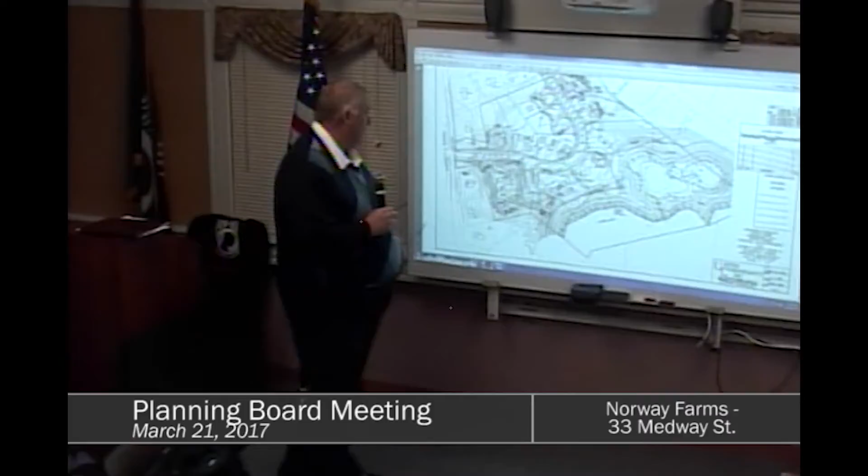All right, good evening. Rick Goodrow with United Consultants, here with Bob and Jean Kane, the owners of the property of the Norway Farms project that's under consideration. At the previous meeting, there were a lot of items discussed, review comments that were received from both the town planner, planning board, and the planning board's review consultant, Beta.

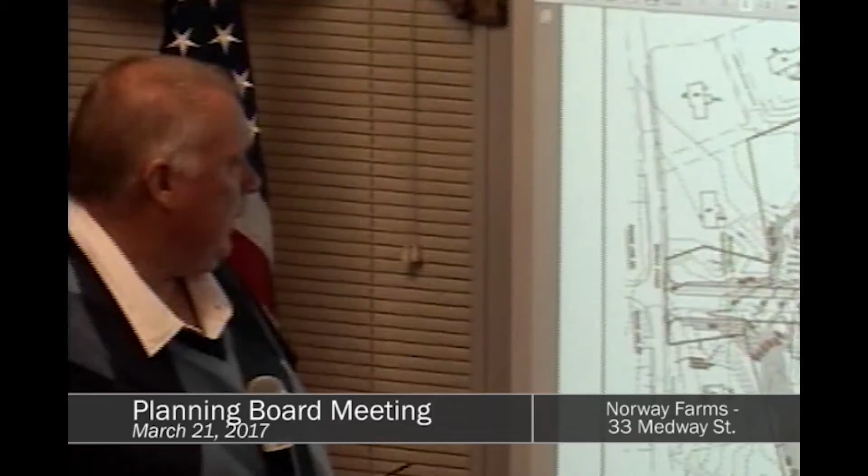We've taken those review comments, we've had some meetings with the town planner, some discussions with Mike from Beta, and also with the DPW since the last meeting, and we've made some changes. We felt it would be wise to come in and talk with the board about the changes we made to get some feedback before we went into a full redesign.

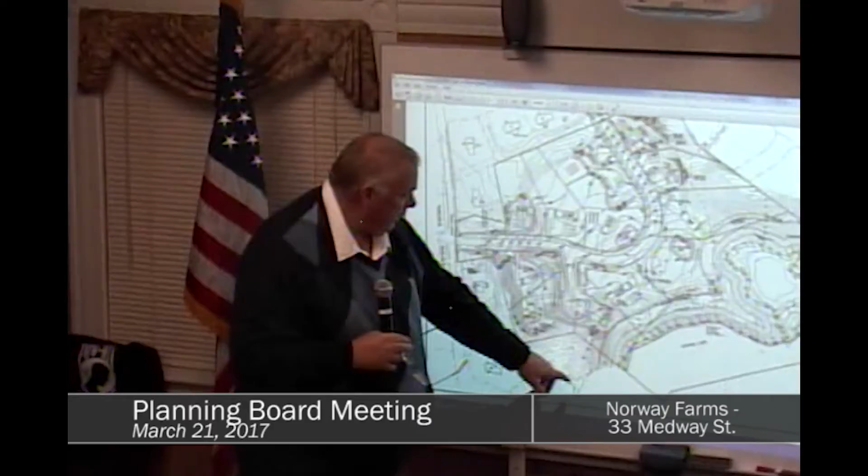So what I'd like to start with is we've modified the entrance road by relocating it to the south a little bit. We've also been able to pull the cul-de-sac away from the boundary line of one of the abutters that was concerned with respect to the grading and trees to remain in that area.

We've also proposed to shorten the cul-de-sac slightly, which would require a waiver from the minimum length of your cul-de-sac requirement. We could extend it if necessary, but again, we were trying to be sensitive to that neighbor.

We also reconfigured some of the lots such that we had the houses and the septic systems and whatnot reconfigured.

What we also did is we provided numerous sketches to the town, four I believe, and I do have copies of the various sketches. I believe the town planner had distributed those sketches to the various board members.

What we basically seem to have come up with is this sidewalk here would be pulled in such that for approximately 150 feet, it would be abutting the roadway, thus no grass strip would exist. By reducing the width of the roadway pavement from 26 feet to 24 feet, we were able to eliminate the need to have both retaining walls. So we felt that was a good fit in that area.

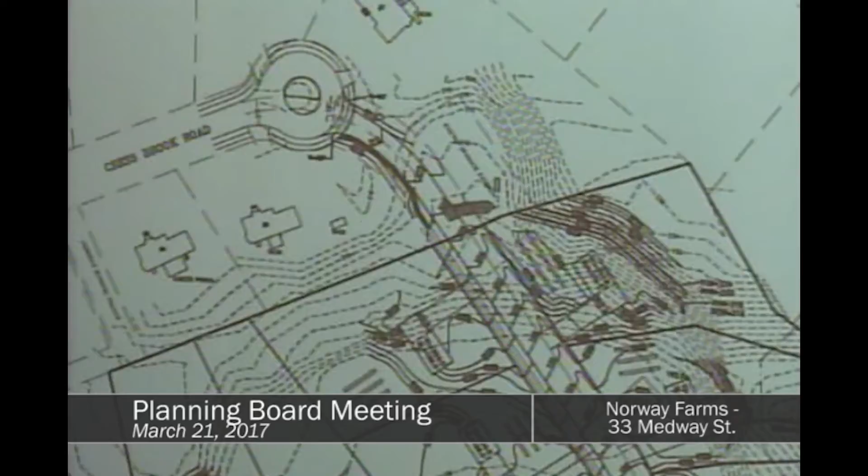Obviously, those requirements of a reduced pavement width from 26 foot required to 24, and the sidewalk configuration, again, would require waivers from the board. We wanted to get some input on that. We did do some various layouts of modification to that island, leaving it there.

We did provide a sketch of the island and turn roundabout, if you will, at Union Street, overlaid on this to give the board an idea of the size and geometry of that. But that all being said, it seems that the best scenario is to basically create a through road in both directions.

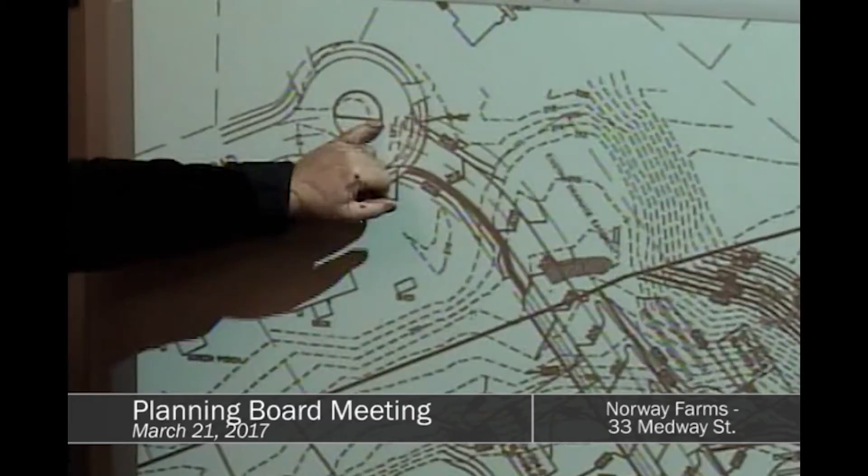So we've provided you with a dashed line so you'd see how that would be. It's just an extension of this radius, which would then terminate at the straight part of the existing roadway, and the cul-de-sac island would be pulled back with two radii installed at each end and a larger radius in the middle, basically bringing that curve right around.

So we felt those are all positive things to address the concerns of the neighbors in this area with respect to the retaining walls and the island, allowing for that existing cul-de-sac area to remain for parking of emergency vehicles, et cetera, and then creating what appears to have been intended when this was originally laid out, which was a through road. So we felt that was a good compromise.

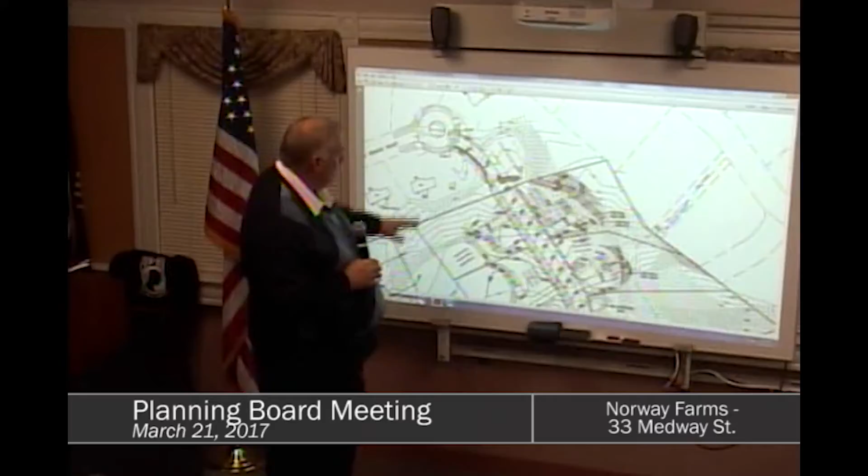What we also did was we proposed to super elevate the road, eliminate the crown, create a drainage swale. Amy, if you could please pull that up.

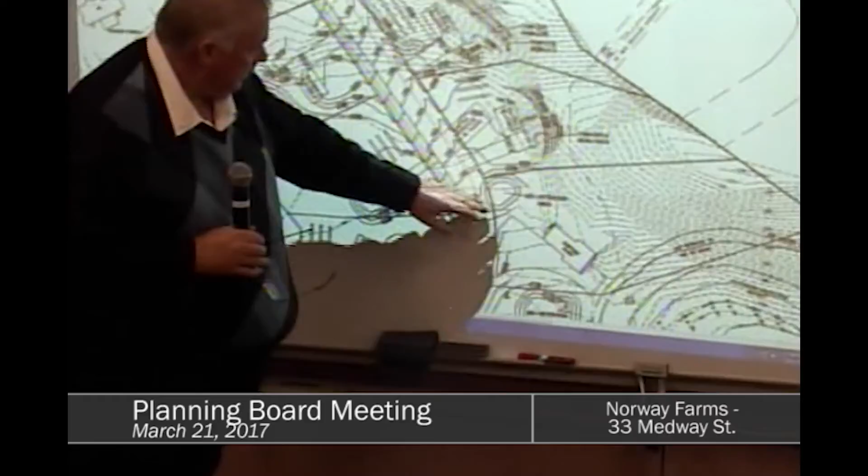Drainage swales would basically discharge to a bioretention area here. Ultimately, that would connect to that bioretention area there. This bioretention area is in the same general area as the original, but much larger bioretention area, that was reduced in size because we were looking at adding some bioretention areas around the site. There's actually four additional ones.

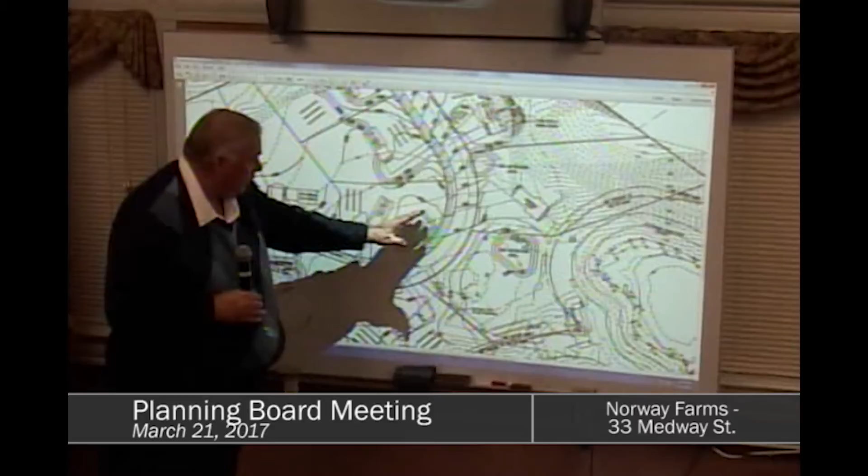So the watershed is such that this area drains towards the roadway. We would capture it through the grading here into a bioretention area here. We would be able to capture the roadway water here, as well as the lot areas, into these bioretention areas here. We have not done a full design, details, et cetera. We have looked at it more on a macro level, and the numbers seem to work.

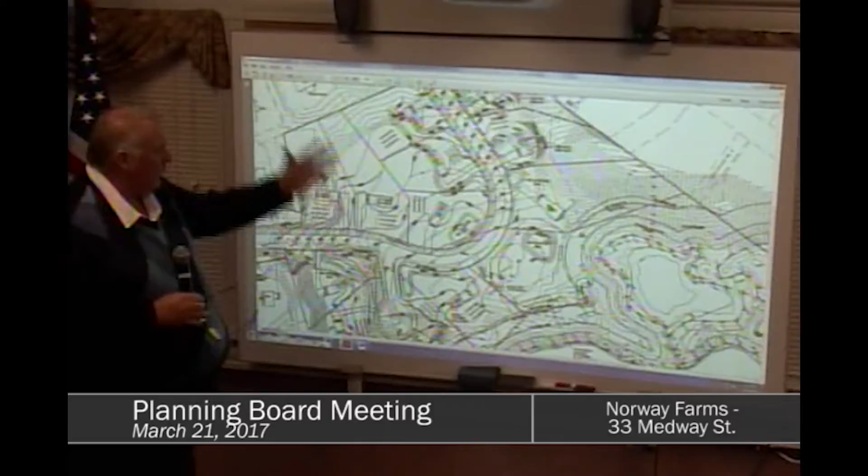But we have such a change from what was originally proposed with curbing and stormwater being captured in catch basins and pipes and sediment forebays, that we felt it would be wise to come in and show everything to the board, have some more discussion with the neighbors, get some marching orders, and go forward.

So that is basically a highlight of the changes that have been proposed. As I said, we have had discussions with the town planner and Beta. I'm sure they can make comments to the proposal as well.

A couple of questions. Could you slide that drawing over just a little so we can see the entrance off Medway Street? You see the cul-de-sac too? There you go. Shrink it? Yeah, we could shrink it or whatever.

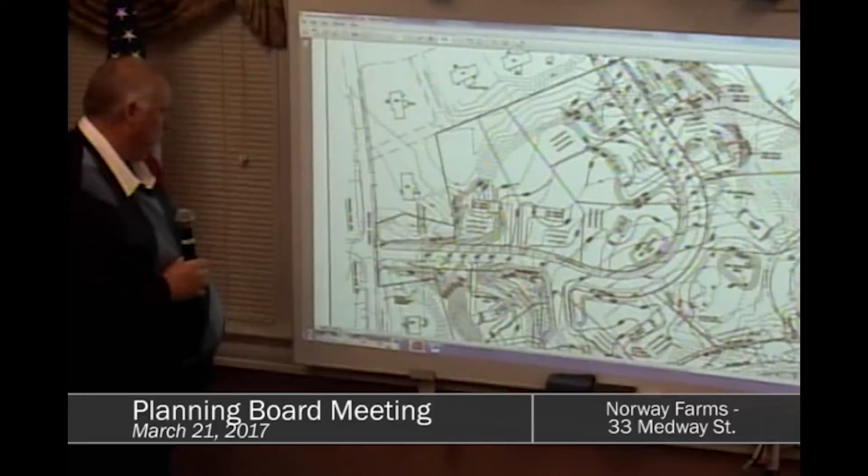Roughly how many feet did you move that road there you were talking about? This road, yeah, here, the entranceway, the entrance stayed where it was. We basically took it from here, exaggerated, and turned it up. Okay, all right. And then what that did was it pulled this back about 25 feet. And then put this curve in, reverse curve into it.

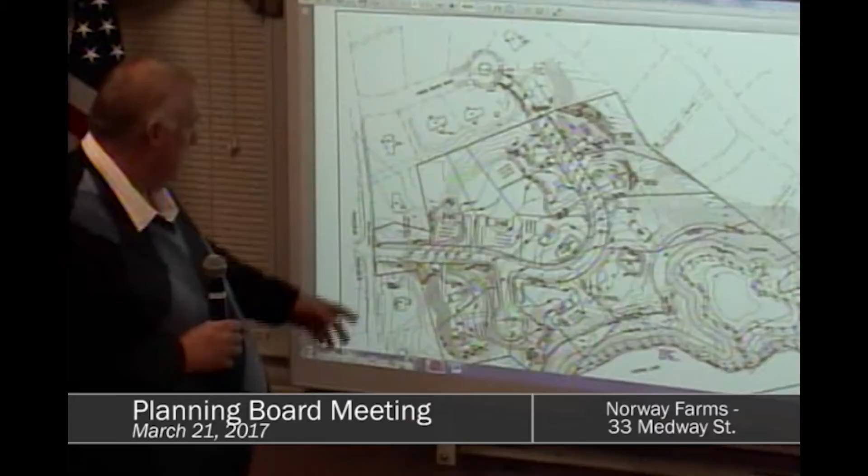All right, now the cul-de-sac, you said you shortened it a little bit? Yes. How much? On top of pulling it about 25 feet, we shortened it about 5 feet. So the length of it today on that proposal is what? I believe it's 245 feet.

It's measured from the center line intersection to the end of pavement. And on the roadway up the hill towards the cul-de-sac, did you change the slope of that?

We did not, but we looked at that. This cul-de-sac basically has a high point right here, and then it comes down at this area at about a 3% grade. So our roadway came up and was at approximately a 3% grade at this location, basically tying in within 1% of what's already existing. That'll happen from here to here.

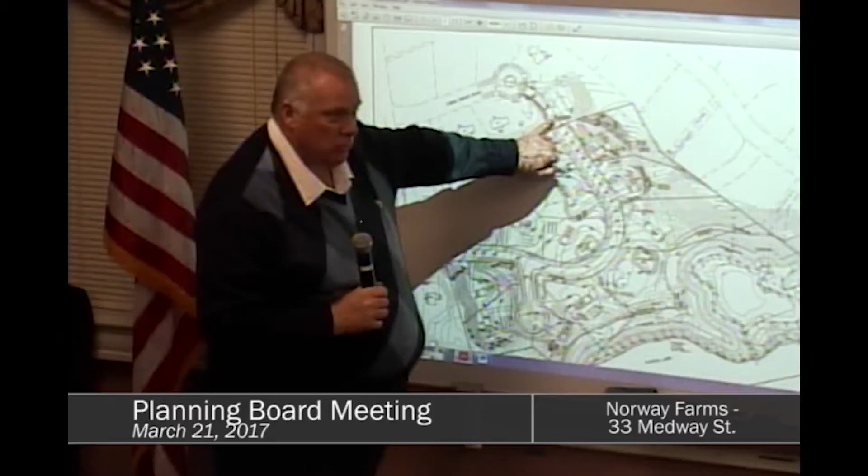So it's roughly a flat spot up in that area, it's already going uphill. From here to here, we're mimicking that, if you will. The steeper part begins way back here. And what's the percent grade? This was 6, I believe.

Jen, any questions? No, I don't think so.

I was going to ask if there was any effort to do more open drainage, but it sounds like you tried to incorporate that, which was good. And then just trying to keep as much of the forested buffer as possible, which it sounds like on the south side you were able to do. On the north side, there's a good forested buffer around the entire parcel, pretty much, isn't there?

There is. My point is just, would love to see the clearing and grading limited as much as possible. I know you have to do what you have to do.

In reality, there really won't be, we're proposing very minimal grading in the wooded area here and up here, and then obviously for the road construction, a little bit here and a little bit down here. This area is wooded, but we certainly don't want to be cutting down trees to create lawn areas for yard extensions. So that's not necessarily in the plans to do that.

Okay, that's good, so we want to maintain that. One of the comments from Beta was to define the limit of work. We had defined the limit of work for the areas in the vicinity of the wetlands to address the concerns of the conservation agent, and we're going to further identify a limit of work on the final plan set.

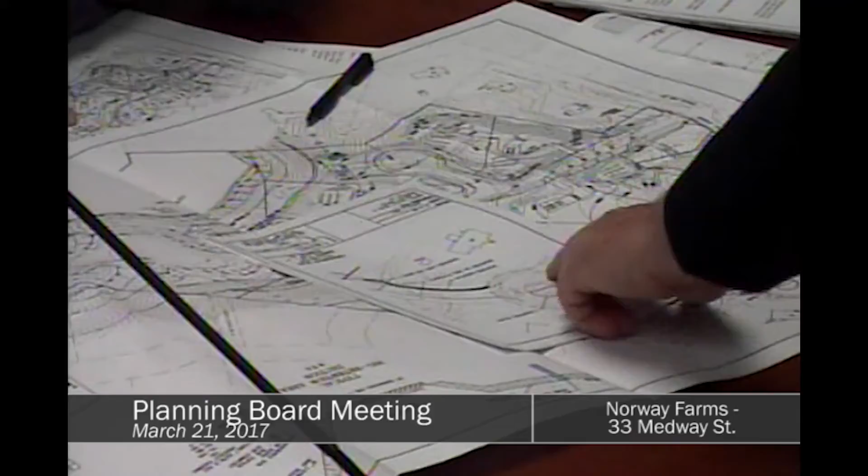So the transition would occur in that area from 26 to 24 feet, and we could look at various things for that bulb there. Yeah, I think it works.

And I have more of those sketches if other board members would like to see them. Rick, can you grab me one? I was having trouble visualizing it. So what happens to the top part?

Is that left there? Yeah, that's just left there. Is this all pavement? That's left there, yeah. So this pavement up the top is gonna be left there but not used? That would be the area for emergency vehicles. So you're gonna have the road going right here, and you get this, but this is all pavement. That's correct, it's gonna stay.

There's still two driveways coming into that area. Yeah, I know, that's what sort of... it's different, very different. I think it looks shitty myself, but, oops.

This is supposed to be uniform, that's the only thing I disagree with. It's supposed to be harmonious, right? So basically now the harmony seems to be gone because we've got a 26-foot road going into a 24-foot road. We got one place with a sidewalk, two sidewalks on the other, and then you're gonna have this huge paved area here up at the top.

That's a big area, that's a real big area for pavement. I don't know, just personally, maybe the neighbors could... I don't like the look of that at all. I think it's a lot of pavement. How long is it at the longest length? Like 35 feet up at the top there?

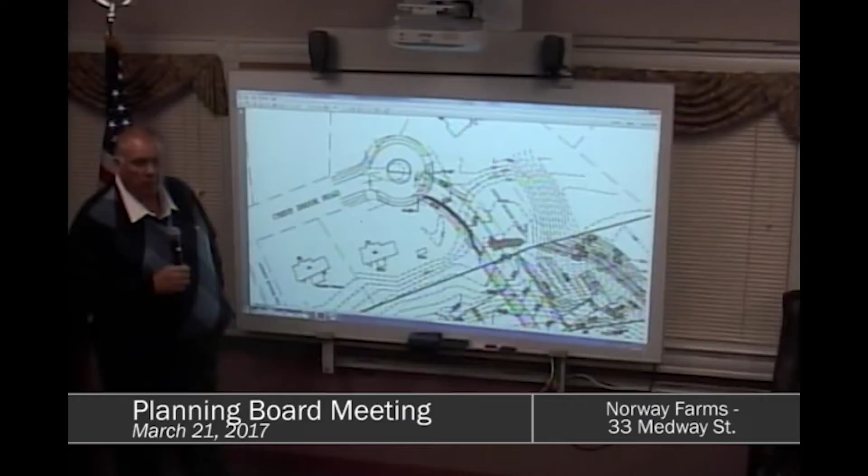My recollection was that the neighbors were concerned about having the two parking there now, and that they would lose their parking. So this was one solution to that issue of maintaining the parking.

But I mean, how many driveways are going onto that big half of the cul-de-sac? One driveway here and a second driveway here. I mean, I know it's hard to see it on paper and visualize, but that's a lot of pavement.

Yeah, the other thing that's important, I took from the conversation at the last meeting, was that the cul-de-sac, the island of the cul-de-sac, was carefully landscaped and maintained by the neighbors, and they'd like to keep that. They don't want to lose that. So this was another way to...

But they're losing half of it. They'll lose half of it, but keep some of it anyway. Maybe the neighbors should wait - it's just my personal opinion, but maybe they can have a say if they understand what it looks like.

What's deceiving is when you have something on paper, sometimes you can't understand the enormity of how much asphalt is going to be there. Well, it's not like we're creating it new, John, it exists. So what you're doing is you're taking the landscape area in the center and cutting it in half.

That's true, that's true. And the reason we're doing that is to respond to the neighbor's concern that there was not enough room if we limited all of that above where Rick proposes the curb to be, and just get rid of that. There's not enough room for emergency vehicles, and I have a handicapped son who uses them from time to time.

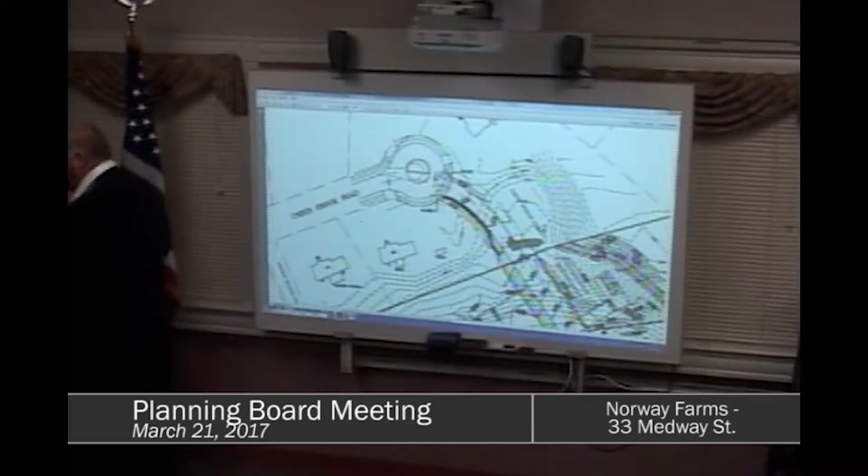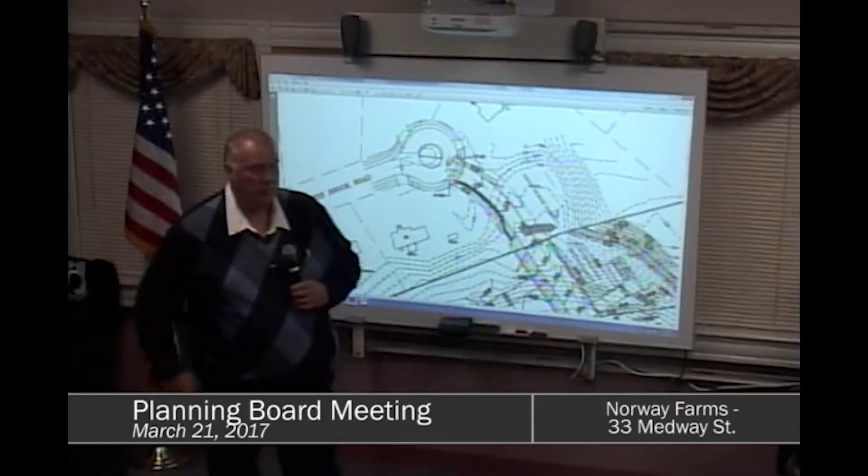What's wrong with sketch 3? Sketch 3 is basically the overlay of the geometry of Union Street in dark color compared to the existing cul-de-sac, just for comparison purposes, so you can get a feel for how that would work, how the traffic calming would work by going through the roundabout at Union Street. That would be if you just left it alone - it shows you how big that cul-de-sac actually is.

I always like the idea of mitigating the speed of traffic by having them slow down when they can see and go around the cul-de-sac slowly, leaving way more landscape. I don't know if the folks that are going to be there realize that's a lot of pavement - when it's paved, you're going to see it's a real lot of pavement, that's all I can say.

To me, a kid could go right through, nonstop. I don't think that's what I had in mind last time. I thought the island was a good factor just for safety. Well, it looks like he has other options here where it would preserve the entire thing, and a couple of them.

One other question - can you describe these bioretention areas all along the roadway? What do they look like, how deep is the grade down, and they're grassed, I'm assuming? They're approximately 2 feet in depth, with a 3-to-1 slope, though we could certainly flatten them to a 4-to-1 or 5-to-1. They would be vegetated with various plantings as originally proposed - trees, shrubs - to make them landscape features as opposed to a typical detention basin.

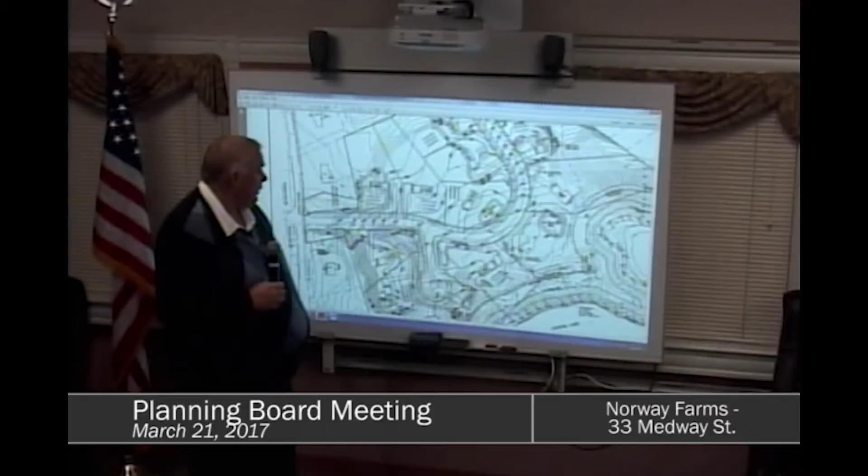How do you construct the side of the road that has just the pavement edge with no berm to stop it from chipping off and becoming a rough, uneven edge? There are various things we could do - what we were proposing is to put a pea-stone diaphragm, which would allow the water to go into the diaphragm. No, I'm talking about the side of the roadway that's not going to have a berm.

At the side of the road, you'd have a pea-stone pavement edge and abutting grass area. Then there would be a pea-stone diaphragm approximately 8 inches wide and 12 inches deep. The water would flow into that instead of going back under the road, which would help protect the edging of the pavement.

Have you seen this in use anyplace? Yes, we've actually looked at the Norfolk landing site. We've had that design utilized in Franklin.

Is the water on this side where there's no curbing, is the elevation pitching away from the street? The elevation of the road would be cross-pitched in this direction, directing the water from the curb line into these. What John's asking is, if you've got no curbing on one side and the sloping is coming down to that pavement, what you're going to have is the water infiltrating over time and causing heaves.

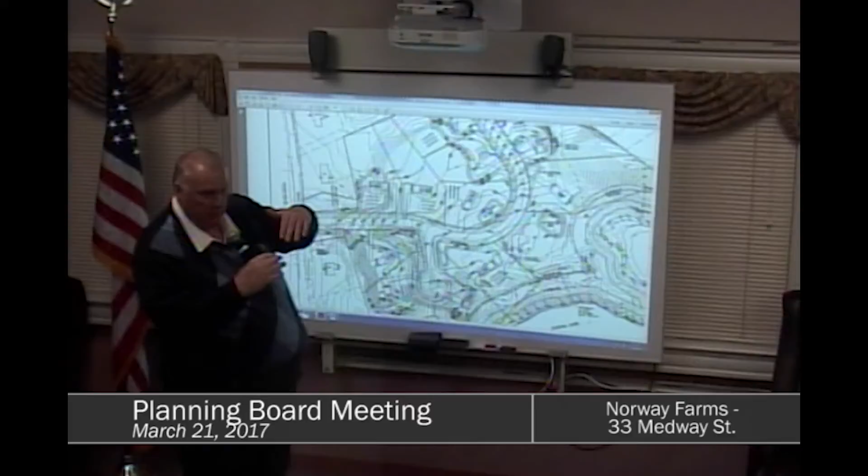From the roadway? Yeah, that would be one of the benefits of the pea-stone diaphragm, to get the water into the diaphragm and then out of it. The diaphragm could be pitched so the inlet side near the pavement is slightly higher than the outlet side.

The problem, once the plows come, is with the pea stone on the side. We curbed that whole thing, I thought. Can we do the Cape Cod berm for low impact and still have curbing? The plow goes around once and you've got this pea stone border around the perimeter of the street. The plow digs that up, and your protection is now all gone.

We could use curbing on that side to channelize the flow, and then just do an area where the water would run off from the gutter with a larger stone. We'd have to analyze what the flows would be, because you've got to think down the road, once this is in existence and the town takes it over with plowing activity.

That's the same issue as a gravel driveway. They're normally redone periodically because after the plows come, the gravel isn't the same as before. You see this happening in the street over a couple of years once the town accepts it—it's a constant maintenance program.

We did that with curbing on Frederickson, so we just have little sections where the water can run out. So the whole side isn't lacking curb—it's all Cape Cod berm, and then they have cutouts here and there.

What Rick is suggesting, and what Bob wants to do, is avoid that Cape Cod curb, because that gets torn up by the plow too—it gets damaged over time. Not the monolithic curb? Yeah, the plow will tear that up as well.

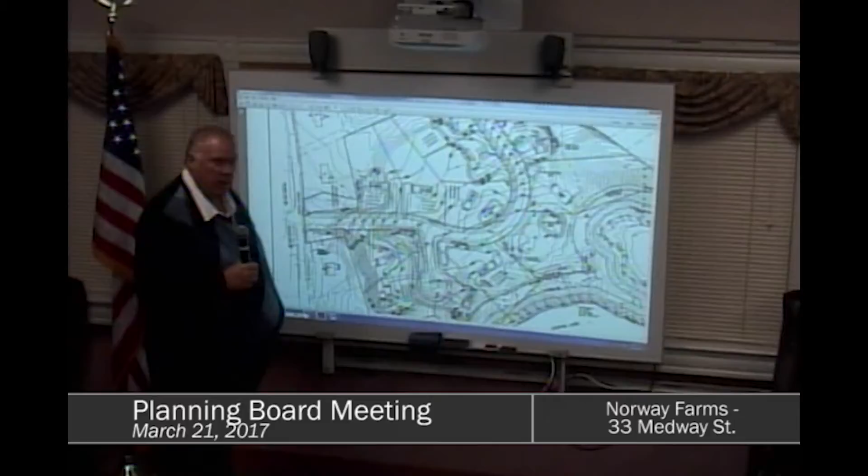Would haunching the edge of the roadway make a difference? So do a 2.5-inch haunch so that any water that does try to make it under, now it's got another 2 inches of pavement, for let's say 6 inches wide at the edge of the pavement. So you drop the pavement down and make it wider right on the edge? Yeah, I mean that would help - the water's gonna get under there, it's gonna want to get under, but it's much thicker, more durable. That helps you with some of the strength over time.

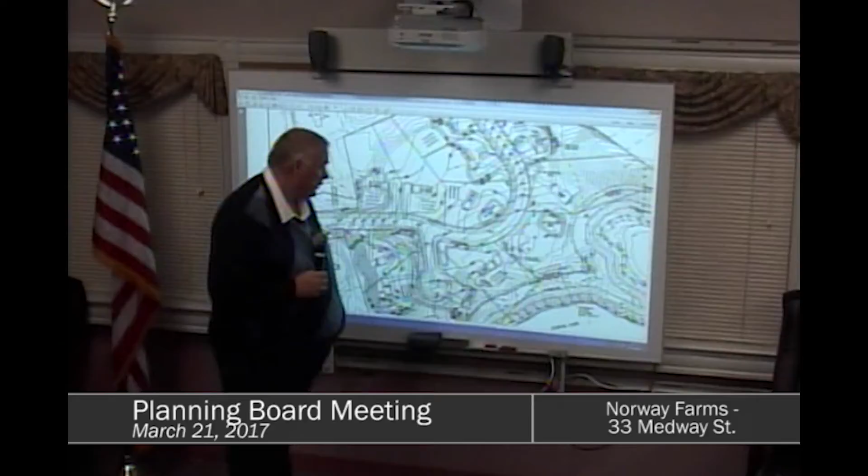Rick, how would you anticipate providing pre-treatment for the basins? Because the filter strip, one of the nice things about it is that it provides pre-treatment. Absent that, direct flow to a bioretention basin without any pre-treatment is going to short circuit the life of the bioretention basin. If we went with curbing and had specific points where water would discharge from the curbed roadway, we would look at something like a sediment forebay at those areas in lieu of the pea stone diaphragm. And you're right, that's one of the benefits - the pea stone diaphragm provides treatment.

I think another consideration should be the slopes we're working with here, particularly on each end where we're at 6%. Edge of road treatment, filter strips, swales can be problematic from a maintenance standpoint on slopes that steep. It might be advisable not to take a one-size-fits-all approach, but consider different approaches in different locations - filter strips being more appropriate in level areas, and edge treatment or berm treatment on the straightaways where they'd be less likely to get clipped by a plow trying to take a turn. If he's going down a straightaway, the berm is going to work well.

A paved waterway at one location that would feed into a sediment forebay. So my advice at this point, looking at this as a schematic plan, is that the overall approach is good. Bioretention basins and decentralizing the stormwater management is good to a degree. I think sometimes we can spread things out too much, to the point where it becomes unwieldy for the people maintaining it in the long term.

I see 6 proposed bioretention basins on a subdivision that could probably achieve the level of treatment required with maybe half that number, which is the next question, right? I would say that the particular configuration of the roadway and pre-treatment should be tailored to the different areas of the subdivision.

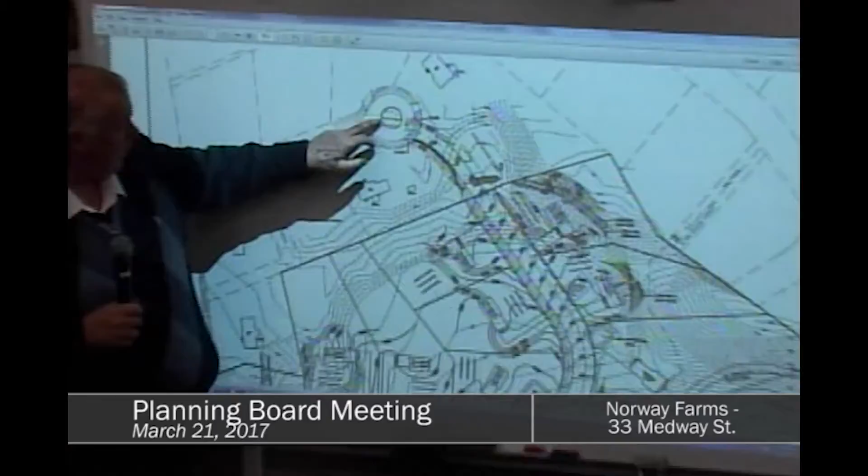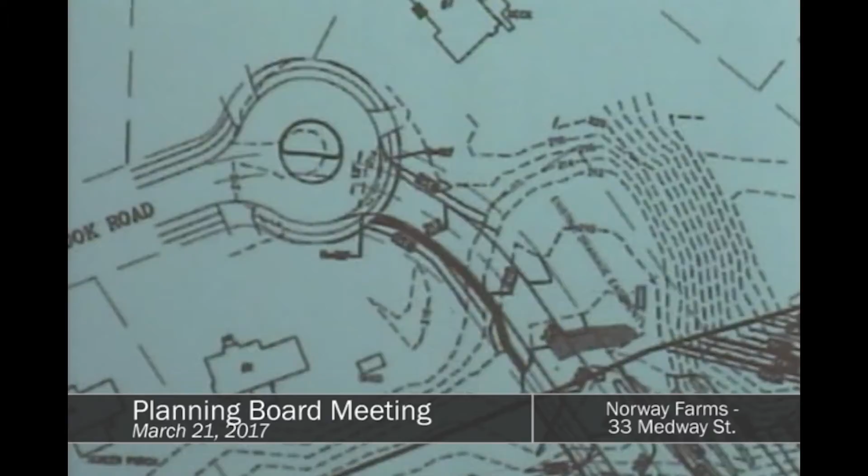Under this configuration, you would have 26 feet of pavement. You would have much more pavement here if that was to remain. And then you basically would transition into 24 feet of pavement back here. This bulb is 120 feet across, 60-foot radius I believe. So you're talking about losing basically 1 foot on each side over 120 to 150 feet through something that has this and this.

I don't think it would be noticeable. Now, if we were to eliminate all this pavement and the island and just make this a straight-through road, then it would be a little different.

Rick, if you were going to go back to 26 feet and go back up to the cul-de-sac there, where would you put the extra 2 feet? Basically 1 foot on each side. We have the road, pavement is centered within the right-of-way.

What would that do to the retaining wall question? It would basically push out a foot for the grading. On this side, it wouldn't be as much of an issue. This side, it'd be very tight. But still could be done. Right here would be very tight. We might need a small wall, maybe 20 or 30 feet long and 1 foot in height.

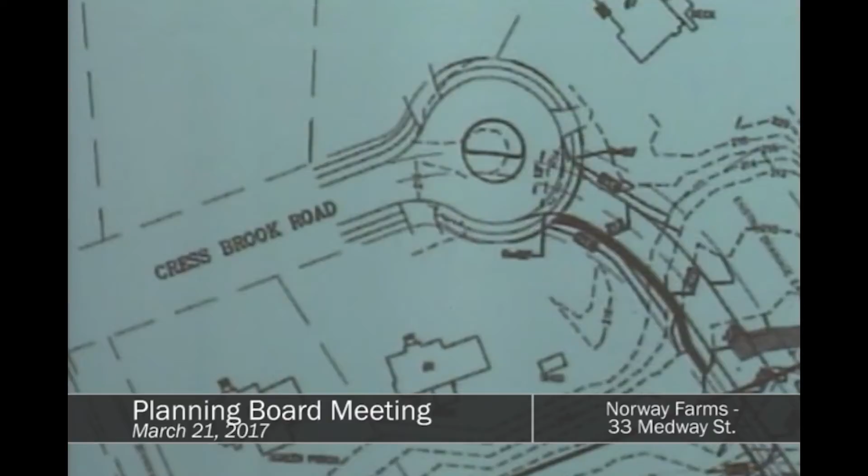But I don't know, is it, old fieldstone walls used to be an enhancement to a street roadway. Has that changed? Folks don't like fieldstone walls?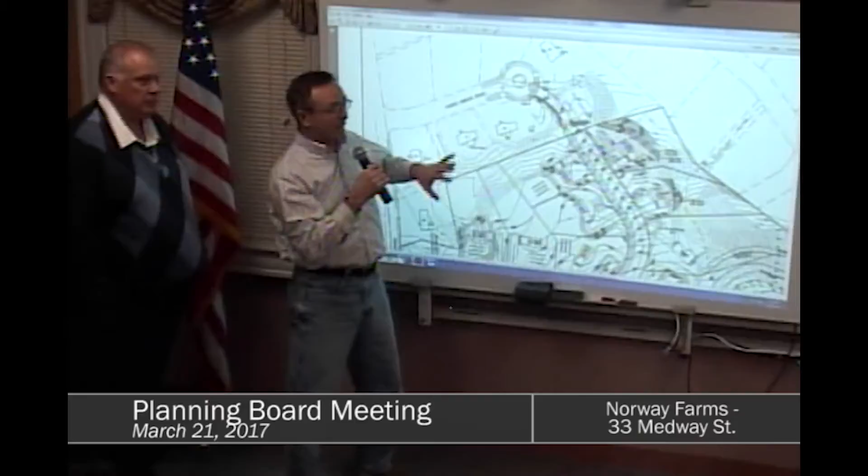Bill Riley, 7 Crestbrook. If I can just step up here, I'll tell you where I'm talking about here. I don't think we're opposed to fieldstone walls, but it's the connection itself, as I stated last time, that I'm concerned about.

And now, Ray, you got up here last time and did your beautiful drawing, and I'm not going to be too critical, even though I am an art teacher. Now, Rick's done a lot of drawing up here that's a lot more time-consuming, right?

I think I agree with you, John. This seems like you're tasked with something that's very difficult to find a solution for, to make this connection. This goes back to what I was saying last time. This road is designed to go straight in and have that circle, as we've had all this time. And this seems like it's being forced into this circle.

As a town that has our rotaries in the center, our roundabouts, you've stated that this is the exact same size as the ones in the center? Slightly smaller, or roughly - when you lay it on there, it's pretty much the same. So this idea of cutting into the center there, yeah, you're left with all kinds of pavement. That's not going to change.

I see that as confusion for someone driving in either direction. Do you go around the circle? Do you go through? This is wider, so someone coming out - do they just shoot right straight through, or if they've been driving around town, are they kind of inclined to go around these circles? That's what my impression would be.

Now, we did state that personally, the circle is helpful to us, as we have many people that visit on a daily basis for medical reasons. And we've been kind of trained not to have cars park in the driveway in case we ever have to make that 911 call, which unfortunately we've had to make in the past. So people use that circle, and the neighborhood knows it - they see the cars there all the time. So the idea of eliminating that and pulling the land out to meet this circle really goes against one of the reasons why we moved here in the first place.

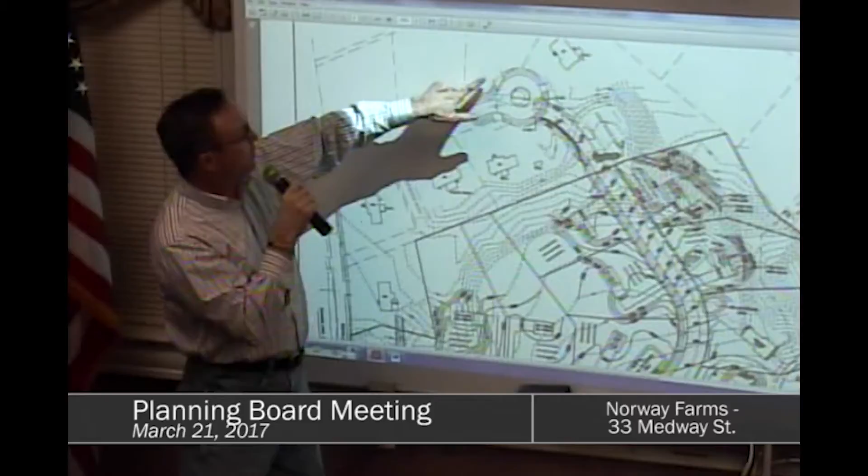And we have basically 3 of them, if you count the cars, which is right on the cusp here, but certainly mine and our neighbors to the left of us, we go right into the circle. I don't think anyone would ever design a roadway with driveways going into a roundabout, other than in a cul-de-sac setting. So bringing traffic flow in here, I think, is more dangerous than the benefit to connecting to the second egress. Which brings up another point.

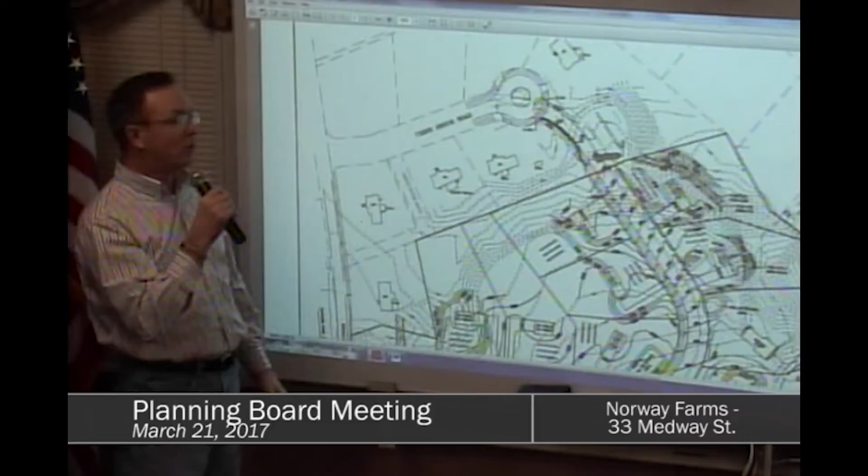I know we talked about the other access, which the board had said we don't have because of the land release from Borelli in the neighborhood behind. Is that what this is here? Yes. Is that what that - no, it's an easement? Canterbury, yeah, to the right. But is that where the proposed easement was? It's there, okay, all right.

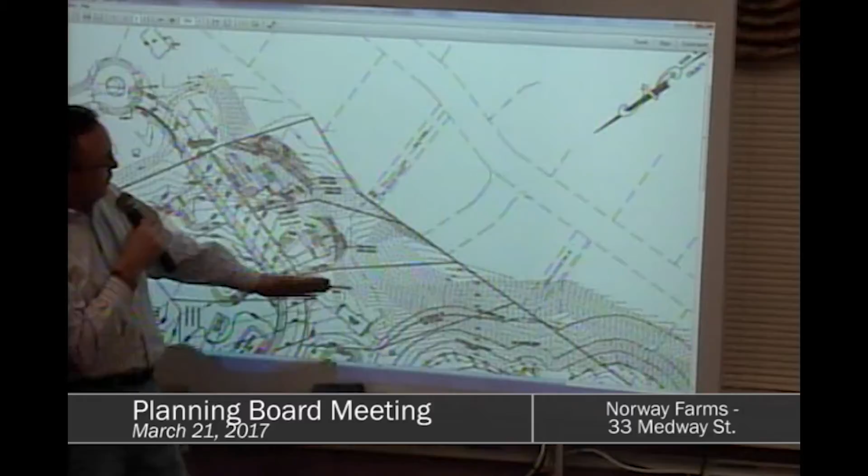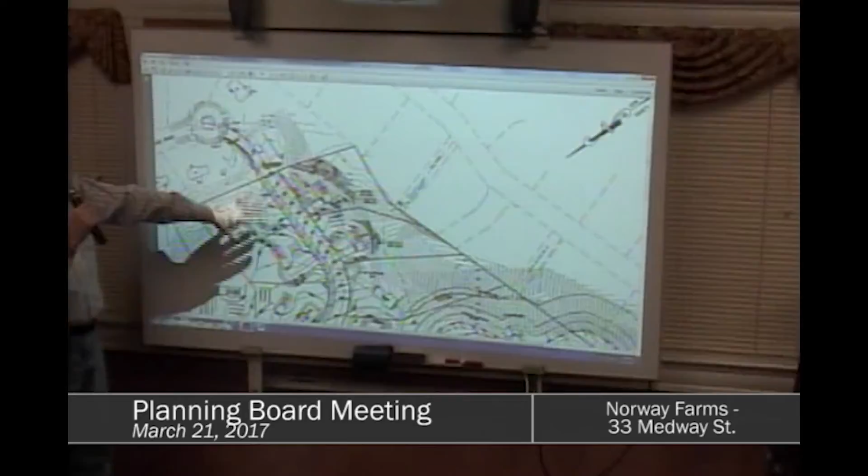The thing about this is that it looks like it was designed that way - you have a perpendicular road heading into another road. That makes sense to me. Now, I realize the issue is with the land. I guess I would say now, is this development being held up in part because of another development not getting their road accepted? I'm not sure to what extent it needs to be completed, but is there any way that some pressure could be put on Mr. Borelli?

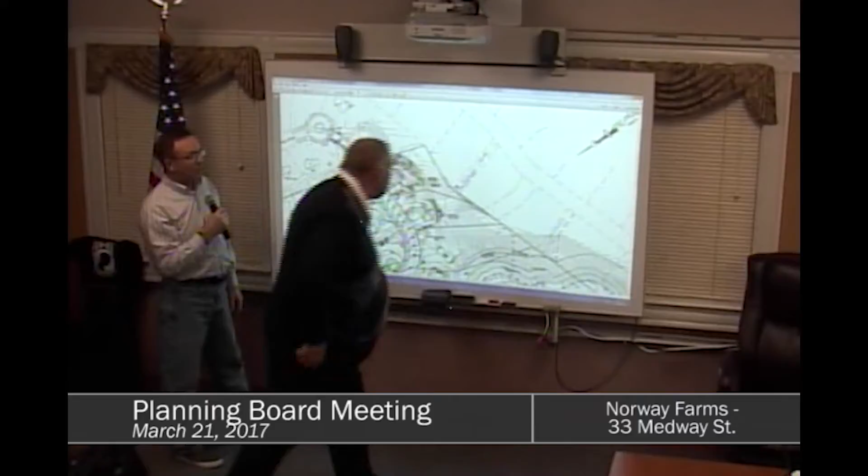Well, independent of that issue, I've walked that right-of-way there and stood at the top of that hill, and I agree with the fire chief that cutting a road through there is going to be too steep for his vehicles to get up and down, particularly in bad weather. So I think that's off the table, personally.

Has there been any engineering done on that? You'd have to start back right at the street there and start your cut. If you wanted a flat spot before you came into that street and a flat spot at the bottom, it would just increase the slope in the middle. But that's like a 50-foot grade change or something. Yeah, that's probably too steep - it could never comply with anything. I'm not sure why they would do that.

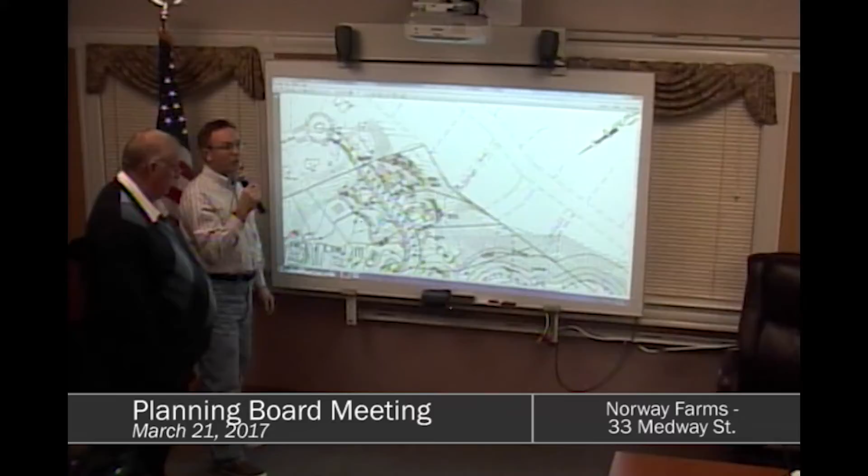Just out of curiosity, how is it that these plans get approved at some point for having an easement if it's known that it's not going to be a useful one? Good question - yeah, I don't know. Because I don't see this as a useful one either, but for different reasons.

Rob, do you know why that easement was put there way back when Canterbury was done? No, sir, I don't - it was just put there. But you know, when their road was put in, nobody took a look at what was down gradient, and I got flooded out multiple times. And Greg came down, and Mr. Borelli ended up buying a lot of the property.

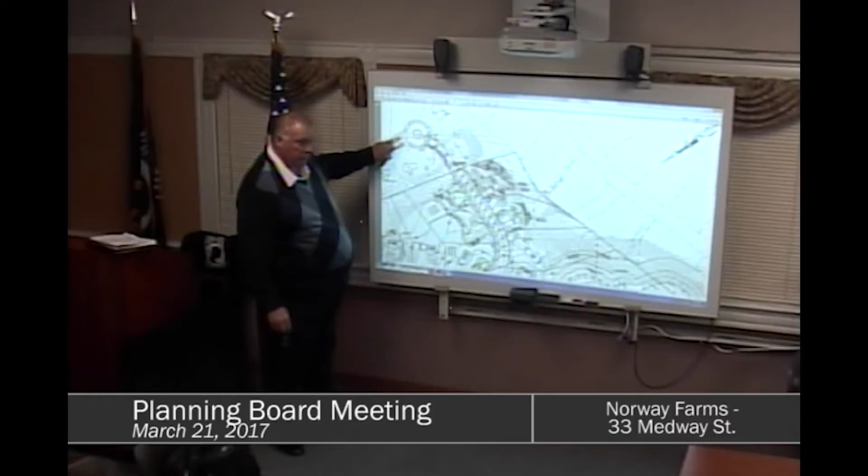So are you suggesting that we carry this straight across and get rid of that? So that would make it a continuous 26-foot street, and then take something of that shape, maybe, and bump it out there? Well, I'm not exactly sure what shape it is, but the idea is to provide parking for 2 or 3 vehicles.

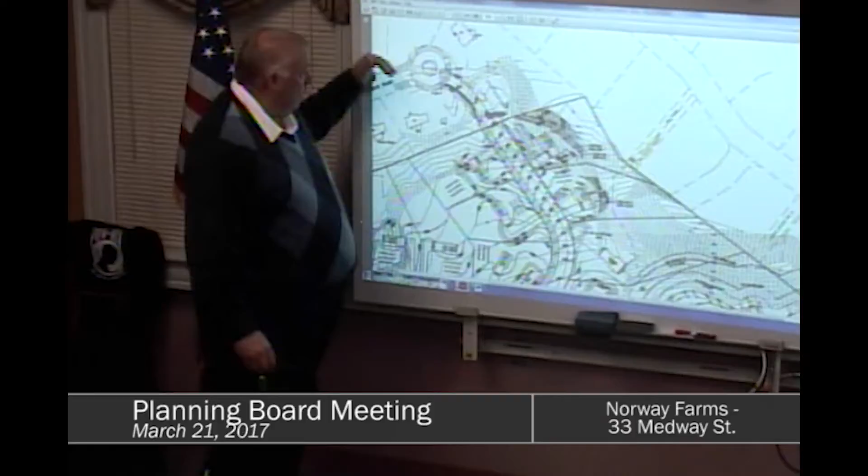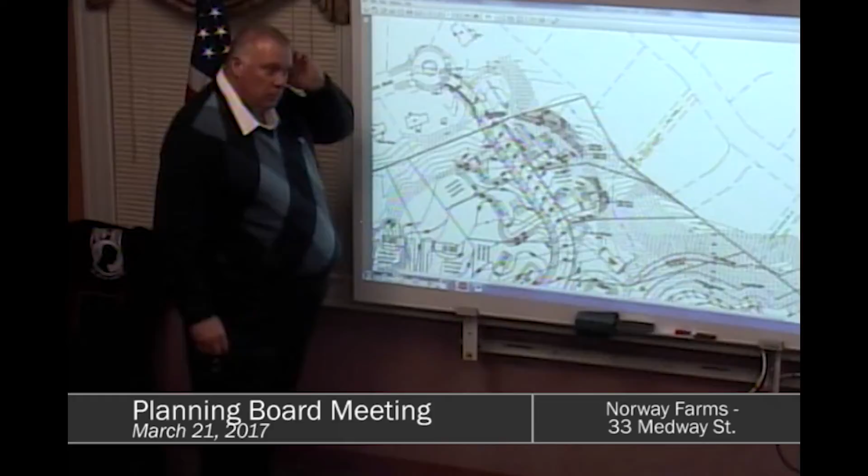I'd be reluctant to have head-in parking backing out onto the street. Agreed, this would be parallel parking. Yeah, I'd like to see something more gentle like that, but in reverse. You've got to worry about bringing the driveways out to the street at the same time. So you're saying the upper half of that island that were to remain could be extended up a little bit more?

That could be expanded up there? No, does it still give enough space? The island is going, under this scheme, the island is going. Not completely, but physically it's just getting out of there. Completely? And what you've got is a certain number of square feet, so you'll turn it into a parking place.

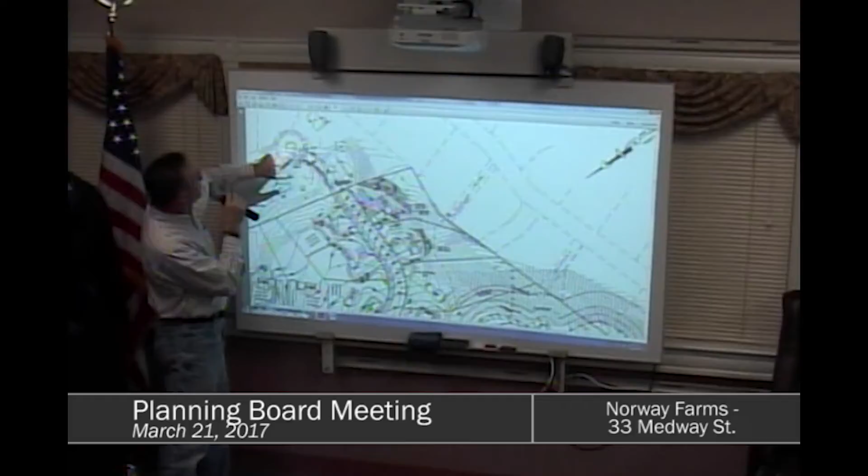Rick, can you draw on the board what you'd thought it'd be like? Can I just ask another question since we're talking about this? Looking at the drawing here, this has concerned me from the beginning. Any way that this connects into the circle - our driveway is right at that point. Are there any regulations as to how close the edge of the road and a driveway can be?

We want the developer to move the sidewalk so that it's safe. Yeah, we want the sidewalk moved. That's easy voting, right, that's easy.

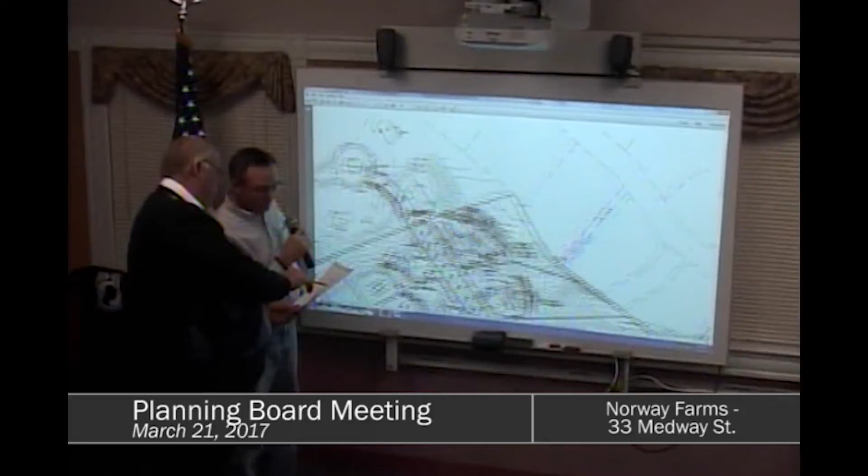I was thinking of tying right into the driveway, something like that - that curb line would come straight across. I can show this to everybody. Rick, you would need that marker to draw right on the board. Sure, that marker right there.

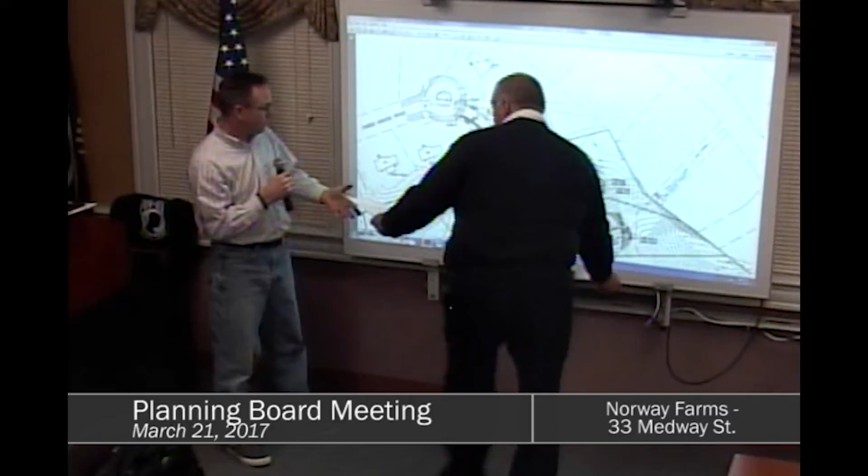We're trying to make it as green an area as possible, but we also need parking spots, and we need it to be safe. Bring this straight across the road so you don't have driveways pulling off onto the road. I understand that, I just didn't realize it would come up.

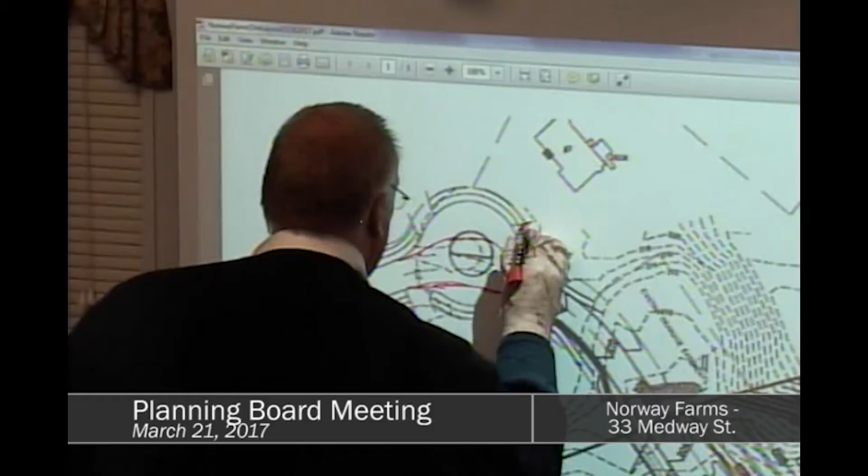We'd kind of bump the road out like that to allow for the theoretical parking area, and I would suggest bringing the driveway in as perpendicular as possible, and the same type of thing over here. Yeah, that's the concept - we just need to look at getting a vehicle to fit and things of that nature, but that's the general idea.

These will become an extension of their front yards, like where the island used to be. So the island would be gone, all this pavement would be gone, and the sidewalks would get constructed and blended in here.

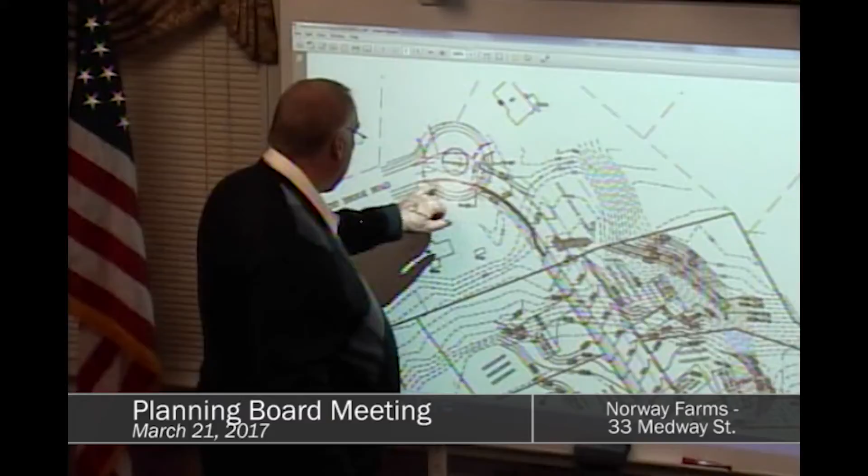Move to the side a little, Rick, they want to see the board. We just can't see what you're seeing - yeah, thank you.

I think we should have Ray sketch it, he'd do a better job.

I had a quick question - could I get your name and address, please? Am I speaking through the microphone? Yeah, just for the people at home. You gotta hold the green light on, hold it down, okay. Just make sure the green light's on, flip the switch. Green light's on, okay, you're good.

I'm Ron Krauk, I live across the street, and I've known the Rileys for years, and Bob and Rob and Jean for years too, across the street. I'd like to see them both get something that works.

And the part I don't understand - I'm going to ask Bill's question in a slightly different way. What procedurally would have to happen to allow an exception to the cul-de-sac rule? Which particular rule? The rule of the length of the cul-de-sac, not permitting Rob and Jean to put the 13 units that they want.

One of the ideas last time was to just get rid of that, not do the connection, and get a waiver for an extra-long cul-de-sac. I looked on the web and found that there are lots of towns that have cul-de-sac rules ranging from 200 to like 1,200 feet. Lots of towns must consider it safe enough to have a longer cul-de-sac.

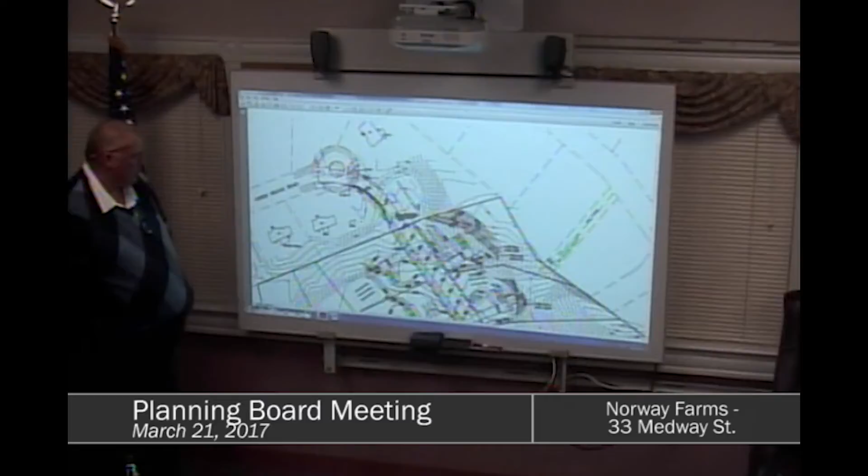Which is that the cul-de-sac comes out, we round off the bottom there, and we round off the top, and then on the top we put some sort of parking area that allows for 2 or 3 vehicles in there. That's fine.

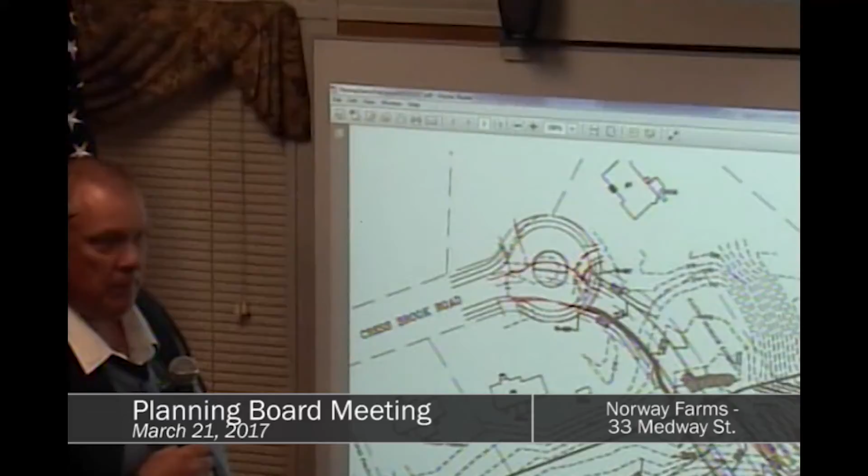Rick, and it's a 26-foot road? Yeah, that's fine, I mean we can make it 26 feet. That's the board's preference. And Beta has offered several thoughts on the drainage system too. Oh yeah, okay, I have a few observations on the cul-de-sac question, if the board wants to entertain them.

The purpose for a cul-de-sac is because you don't have another outlet. You want to provide vehicles, particularly larger vehicles, the ability to go into the dead-end road and not necessarily need to reverse to get back out, which is why cul-de-sacs are as large as they are, so they can accommodate large emergency vehicles and school buses.

By connecting the roads, we are eliminating the technical need for a cul-de-sac. We no longer have that need. We have two means of egress to the neighborhood.

If we stop thinking about the end of that existing Crestbrook as a cul-de-sac and look at it more as a private driveway that serves two other private driveways, and if the concern is people being confused coming up the neighborhood and continuing to try to access that loop, there are plenty of things that could be done with signage and pavement texturing to create enough of a difference between the main thoroughfare and what would essentially become a private driveway—not technically, but practically—so that the number of instances of people driving through the neighborhood becoming confused and attempting to use that loop would be diminished.

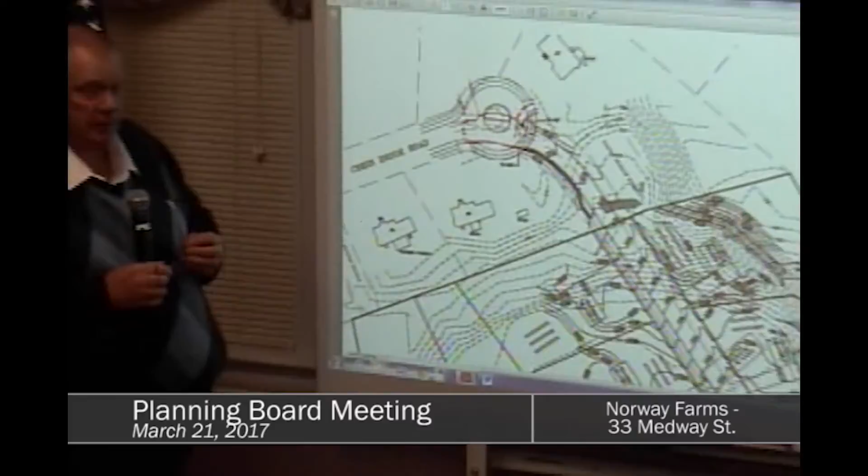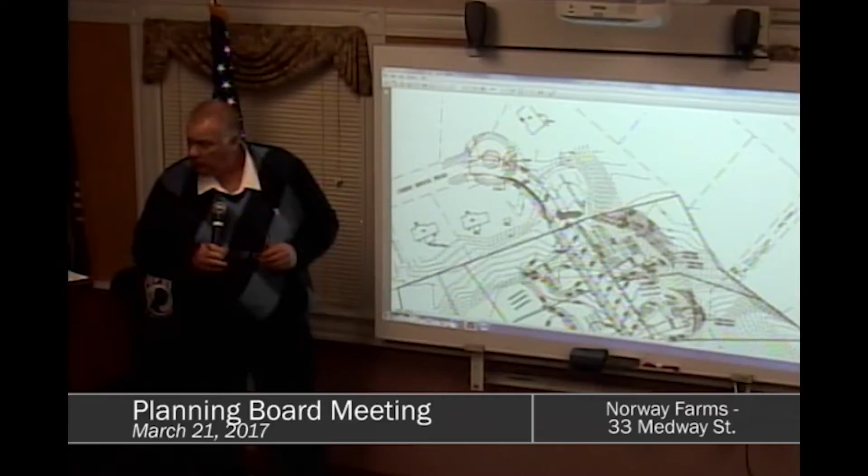The benefit would be that you back out in that fashion and go around. That back-out movement from this driveway could still occur outside of what would be the travel way of a throughway. That would remain an area we'd want to keep people from trying to maneuver through, to allow the two driveways to utilize that part of the cul-de-sac as their own. That's what Mike was trying to get at—it's a private driveway within the public layout.

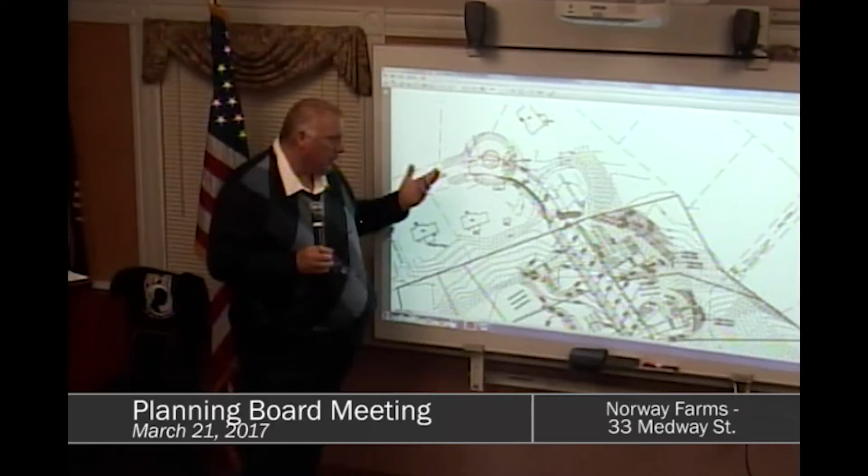That could certainly be done. There are many options here, that's why we wanted to. You could just make an infiltrating paver over there to designate the parking area.

Porous pavement? No, an infiltration paver stone—just to distinguish it. It depends how much money the developer has. I shouldn't make light of that, but it's possible, though expensive for a small area. Rick's idea of some sort of different material running across the entrance to the driveway could work too—flush stamped asphalt or concrete, something like that, similar to what's at the roundabouts in the inner circle, to basically carry the sidewalk across. There are many treatments we could do, with the end goal of discouraging traffic movement around the outer edge of the circle, keeping them on the main thoroughfare, but preserving the functionality of that area for the people using it.

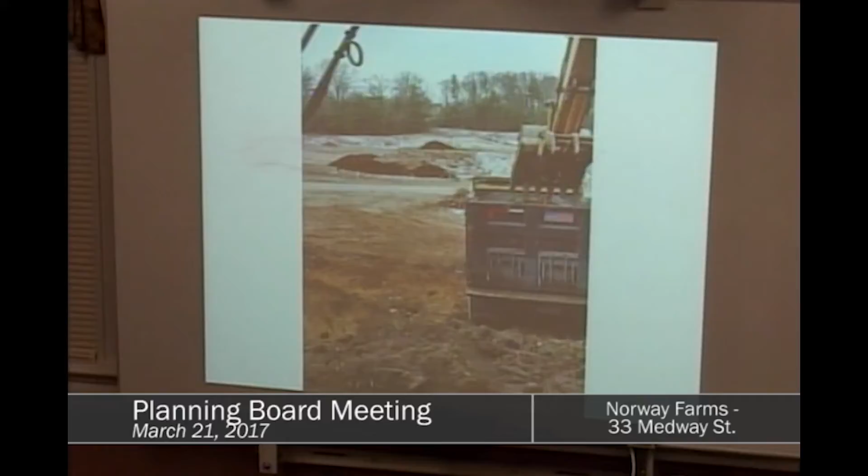Next picture, please. That's me filling my truck, moving the loam where the future cul-de-sac is going to be. That's one of the things he wanted tested, the material being moved and the soil being moved. That's the soil being moved. The material being moved is up on Medway Street, going up towards Medway Street.

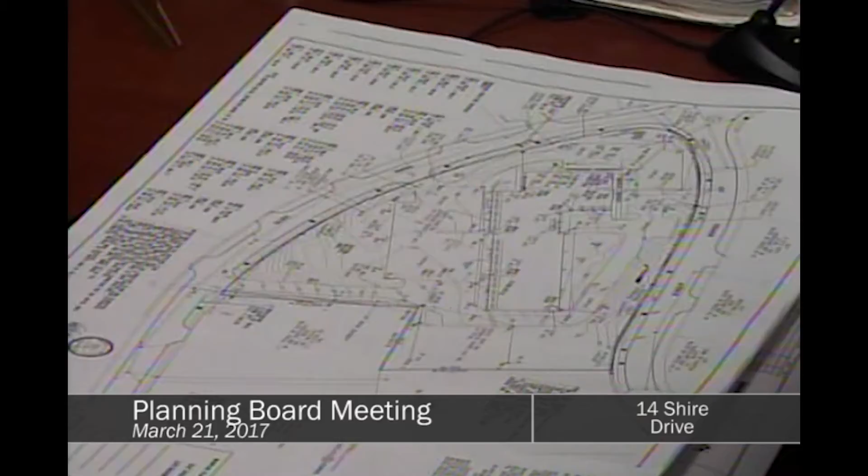This is a lot more than covers, you know that. Oh, correct, I mean, there is an invert and pipe issue here. Yeah, there's one invert and pipe issue in this location, but what I'm getting at is anything that is an issue is going to have to be fixed ultimately before we can do a complete and thorough evaluation and say it works.

What's the bond on this? Hence the purpose of the as-built. Is there a bond on this, a finalized bill? No, there's no bond on this. No, we don't do bonds. Is the building inspector okay with that? The building inspector's going to rely on this board to give them the ability to occupy. And that's why we suggested a temporary occupancy. They believe they can have all the work completed in the next 90 days.

So we have given you a list of items to be completed. They are working on the site, and we had updated it. They have installed the lighting around the site. Has Larry seen the list? It was on the plan. Okay, so he's seen that list. Where's the list of items? Up here, items to complete, yeah.

Okay, so there are 2 roof cover structures to be constructed. All of the slope granite curbing needs to be constructed. The top course of asphalt needs to be placed. The parking spaces and handicap area need to be striped. Fencing and gates need to be installed. The dumpster pad and fencing of the dumpster pad need to be installed. Loaming and seeding, mulch cover for the landscape areas need to be completed. I will say they have installed the street trees, as we've shown on the periphery. They have not done any of the landscaping trees. I don't care about that.

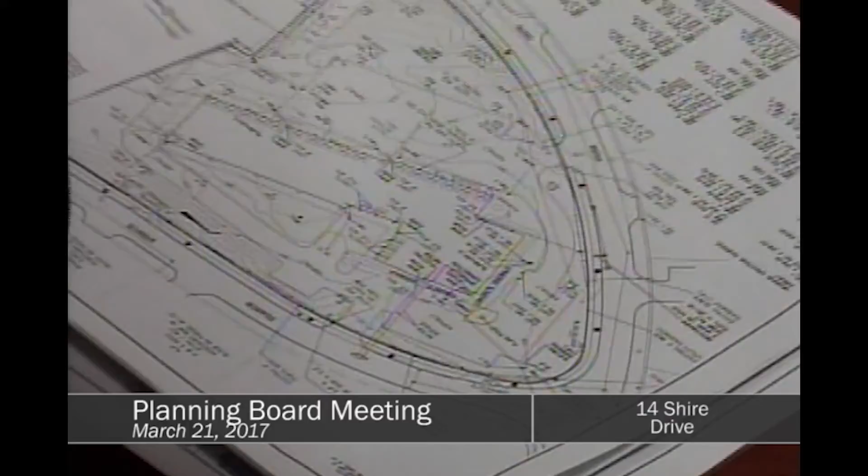Who stamped this system? We did. All right, then you gotta get the design engineer to stamp this as-built to say that all of these elevations and sizes of pipes and invert elevations all work. That's what we need. And we're gonna do that -- our hope was to do that in 90 days, and we can access everything.

Yeah, but you wanna move in there and all of this stuff, we're not sure if it works. Correct, and if it doesn't work, they're gonna fix it. Yeah, but what would that entail? I'm gonna go to Bob McGee and ask him to rip up 2 holes in the roadway. And if we get a snowstorm, he's not gonna be happy with me. Because the 2 manholes you're talking about are here and here in the existing road, and Bob McGee paved over them.

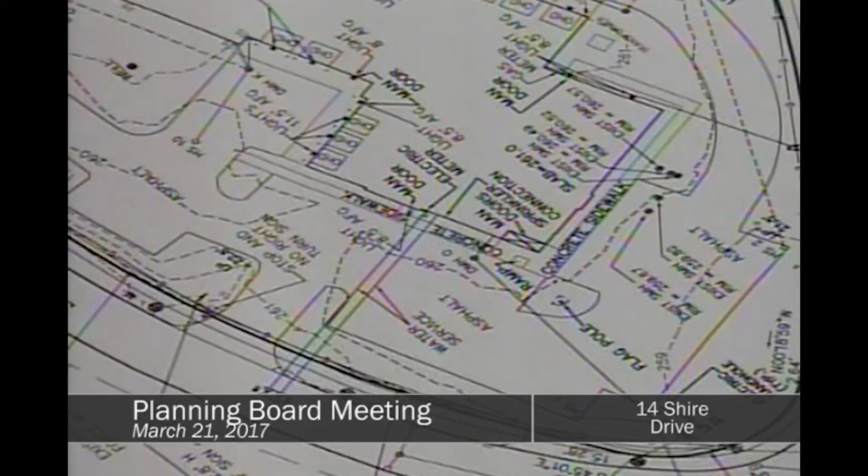But what was done on this as-built is saying that all of the specs on the plans are in disagreement with what was constructed. Correct, some slight, some more significant. I know. And until we can get in there and see where the pipe connection was made, it's difficult to assess if everything contributing to that pipe is gonna function.

So again, they have to go dig up what's on site that we can certainly. When was the drainage finished? Brought to grade last fall, just before they paved it. So we're standing here now in the spring and it's still not addressed. I mean, I'm not telling you something you don't know. You've got 7 line items here and 5 of them say that they totally disagree with the plan. Right, and I know it's private property, but you know.

But that doesn't necessarily mean it does or doesn't work. I mean, and I'm not saying it does. But right now you're not saying it doesn't either. I know, so we can't tell you that, we gotta get that answer. If that's what you want us to do, then we'll postpone this till they complete all the work.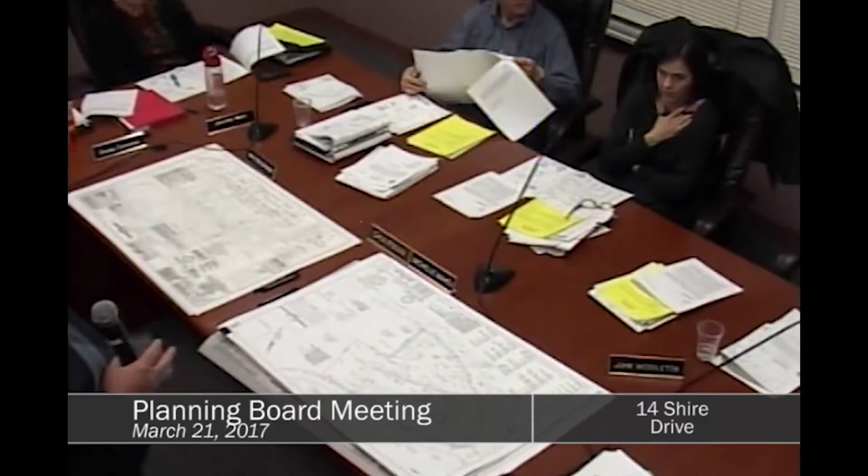I'm only one, but I didn't know it was within our jurisdiction to give out certificates of occupancy, whether temporary or permanent. No, I really don't feel comfortable that that's not our purview. That's a building inspector -- we don't give that out.

So then what are you asking for from us? That you would allow them to issue it. Well again, it's not within our purview. We don't allow them or not allow them to give certificates of occupancy. It's not our jurisdiction.

Okay, so they're not going to give us a certificate of occupancy, and that's their decision. But why, without any action of this board? We normally have a site plan approval when the project is done, but that normally doesn't interfere with the building commissioner doing his job and letting you in early.

I don't know how letting us in early is connected. What would we vote on tonight that would change his mind? We have in the past approved temporary COs, as Rick said. The car wash was one example, where they had additional minor things that needed to get completed. It was just paving.

This is structural, I understand. This is pipe sizes, 12-inch pipe or 15, this is structural, inverts going level. Regardless of the drainage issues, which is what we have purview over, fencing and gates, guardrails at retaining walls, those are safety issues. I'd have a problem granting a certificate of occupancy, even temporary, without some resolution. Those are two of the items on the list that I feel are more safety related. You've got a retaining wall without a guardrail on it. I don't want to tell somebody to move in there. I don't want that on my vote.

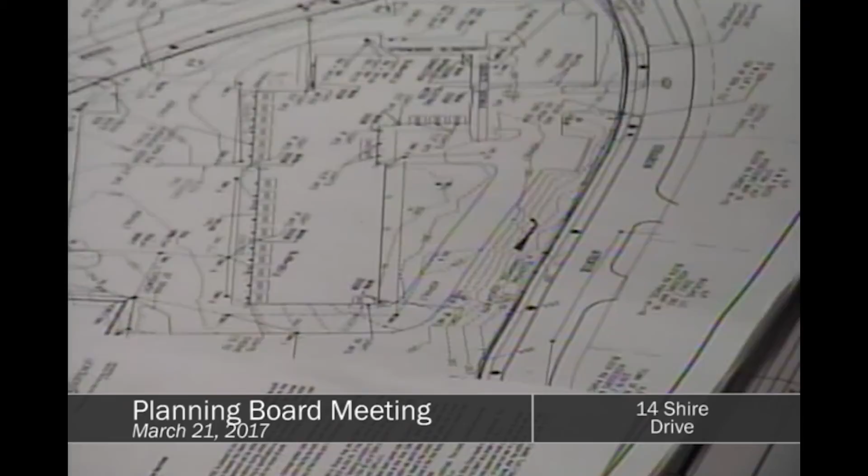I'm not hung up on this being changed from a 15-inch ADS to a 12-inch RCP, because it was a relatively small watershed area, and they made some changes to the roof. That I can tell you functions fine to here. From there to there, yeah, it's a 12-inch pipe leading in. It was a 15-inch pipe leading into the site that was provided from the developer. So it's a 12-inch dumping into a 15. It's a 12 dumping into a 12.

When this development was built, there was a 15-inch ADS pipe put in this area here. When they got out there, it was collapsed, to allow for connection drainage with this one lot that was here. And so it's going to receive drainage from that one lot? That's correct. So it was sized a 12 going into a 15.

They tore out the 15-inch ADS - so now that's a collapsed 12 - and made it into a 12-inch RCP. So they changed the pipe going from the site to a 12. Except the site going into the 12, I guess if the 12's too small on the roadway, that's fine - I mean that I can tell you is fine, as long as it doesn't go uphill. But I can't tell you if it goes uphill because I can't get in there. That's my issue. There's covers in here that we can't get to, you know, and access, because they're paved over.

But the two main ones are the two in the road that are of my concern. So, the covers - some of them are paved over, they're not getting any flow, so it's hard to assess. The curbing's not in, you're getting some runoff off the pavement into the landscaped areas now, because it's not constructed. So you can't even evaluate the system from that point of view.

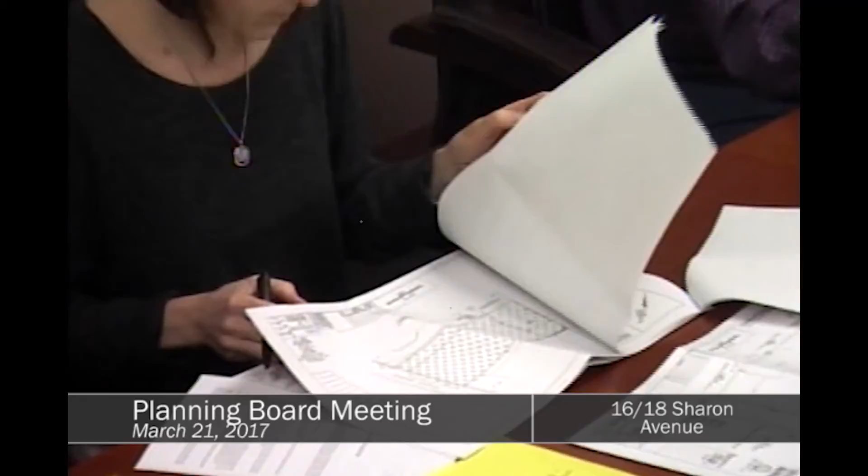Michelle, the copy that I have on sheet 3 of 13 - there's a very faint ghost of the lines. Yeah, and then we found it on 8 of 13 on the photometrics plan. Okay, so thank you. You're welcome.

Does this have a landscaping plan in it? Did I miss it? There's landscaping there - I think there's 1 or 2 trees. I thought we had talked about some more shrubbery in that island - yeah, I think we did, that was added. Maybe it's showing it on the site plan - you've got street trees on sheet 3. Yeah, same, okay, the SMs. Yeah, actually there's 3, I think - there's another one buried down. Yep, I see the third one. My copy's really awful. Yeah, mine is too. And then there's where it's missing the rest of that teardrop island - those dots are landscaping? Yes, the SIs and SMs and GYs. Yep, okay. Yeah, it wasn't a lot, but it was something, anyway. Dress it up a little.

It shouldn't - number 3 is what we were on.

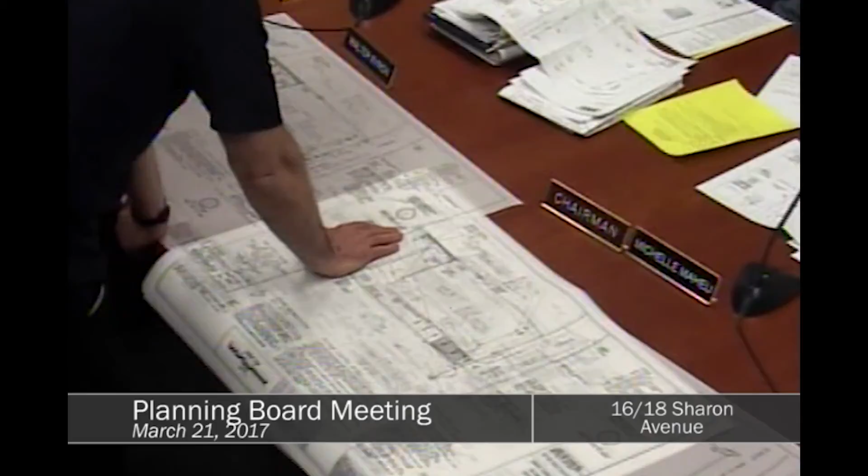Does it have the landscape legend on it? I don't see it. In calculations - oh, he has it down in the planting calculations notes. So SM is sugar maple. That's it, it's the only one I see. Oh, on that planting schedule, yeah, I see it. Where is it? Page 5. Okay, thank you. So sugar maples for street trees seem okay.

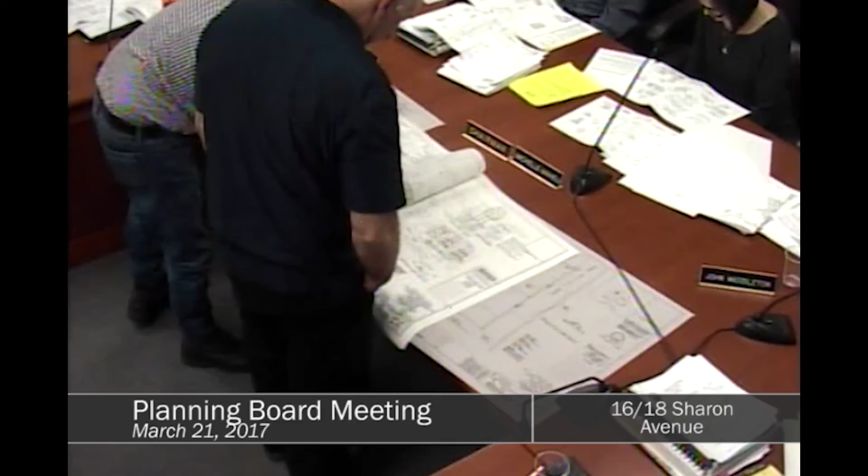There was no signage on this, is that correct? No new signage, I don't think there was. Except for maybe a stop sign, I think he had talked about.

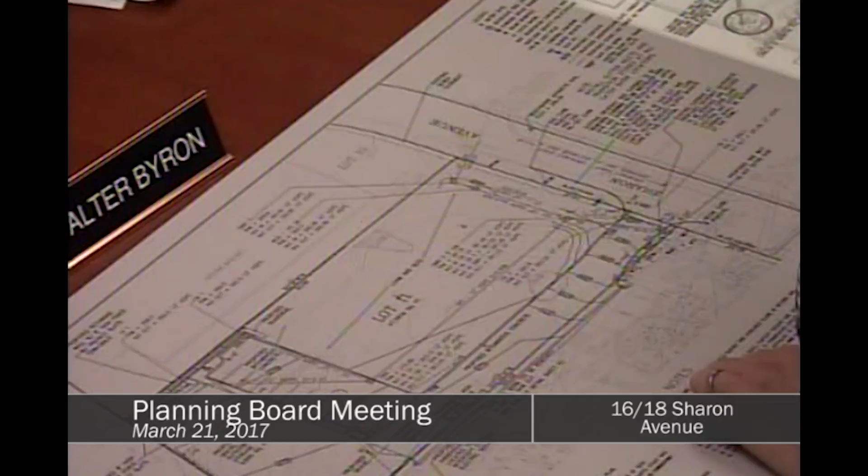Is the island separating one way in, one way out? Yes, that was the idea. So the people that are going into lot, let's just call it 12 for now, they have to come up into lot 11 and then down into lot 12, over where the parking is? Yeah, so they'd come in here, drive along here, and then just turn into the parking lot that's gonna be down in front of that building. So it basically becomes a wide driveway here, with an island in the middle? Yep, so it just is a wide driveway they're driving down.

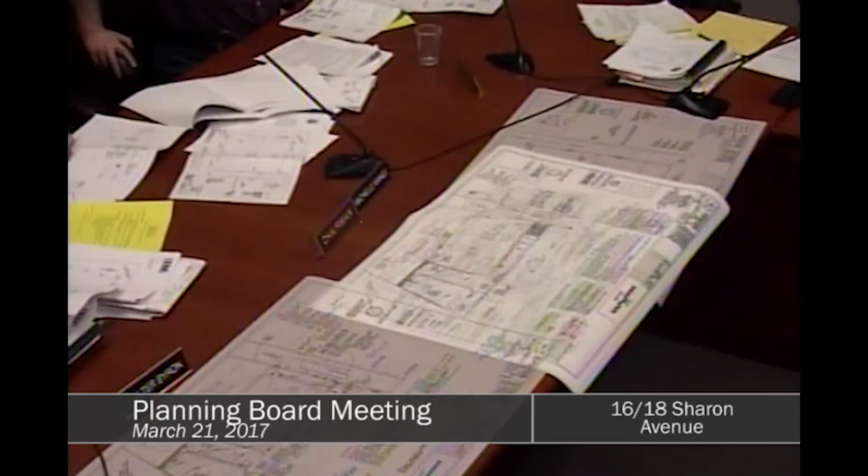To read our waivers, I gotta go to that sheet. We put all the waivers on page 10.

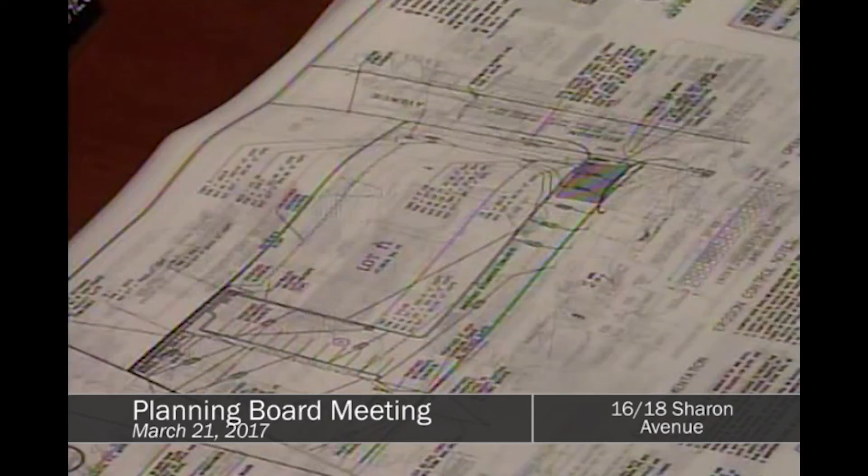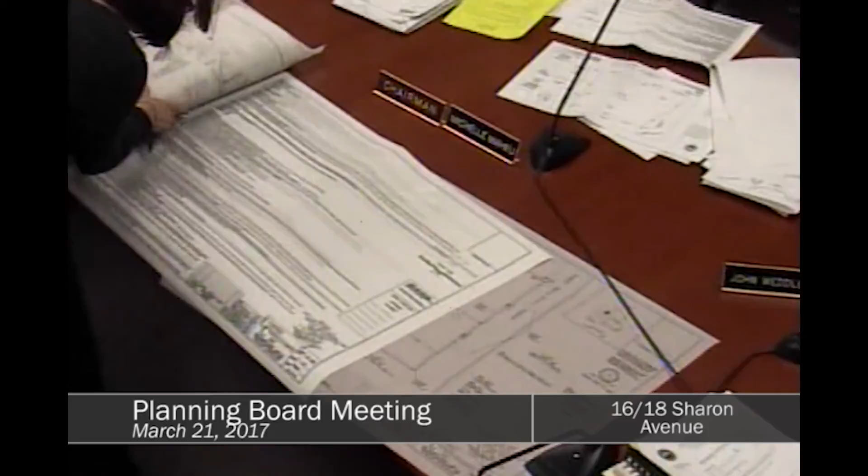Is it normal to put the decision on the plans? The decision's on there. It's kind of nice, but it's hard to read. Can't read anything at my stage. Oh, you can't even read that. Oh my goodness, it really bleeds together.

Just bought a timeshare? What? Those folks need to get something notarized. I guess they were buying a timeshare. So I misinterpreted that as Rick and I were getting a timeshare.

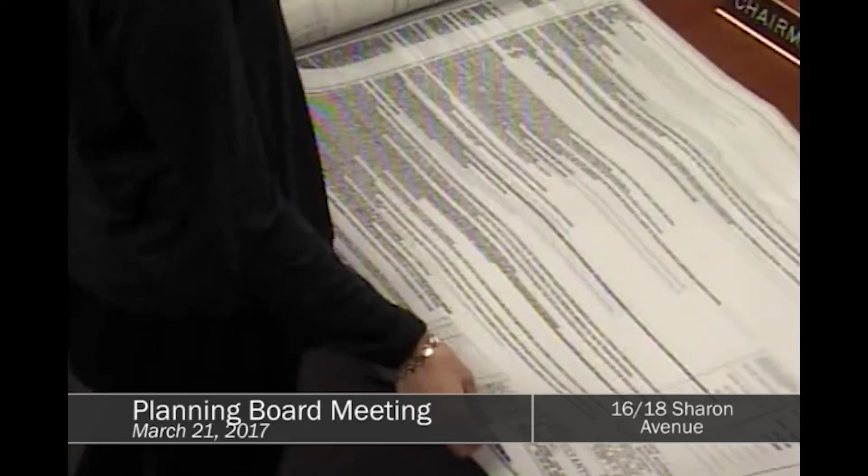So this is super minor and picky, but when you get the decision put on the plans, that's kind of a nice thing. But because of either the font he used or his line weight, certain lines are illegible. So I wonder about the stuff you can read, it's like double, he uses a weird font. It's one thing to endorse it, but if you can't read what it says, that's probably not the best thing. We don't have a separate paper decision?

Do we have an 8.5 by 11 decision rather than signing this? I like the idea of putting the decision on the plan, it's nice, but there's either the font or the line type or something that makes it illegible. Maybe it's the line weight in certain cases, that particular color. Some of them you just can't read. Do you have an 8.5 by 11 decision? Yeah, the decision's been done and recorded, so it's not as important.

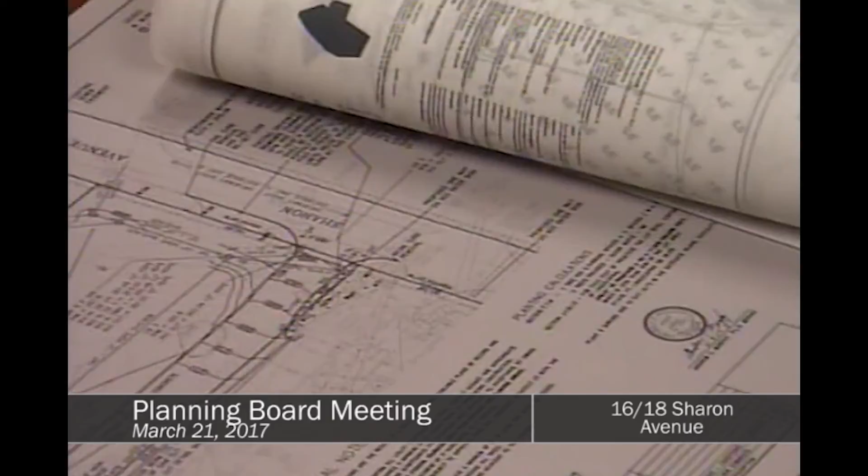We haven't signed it. These were taken from a Word document. As a matter of fact, on the registry they don't even record those pages on Mylar, they only record the first few pages, so those are just going to be inconsequential rather than us having to read it.

No, the decision's already taken care of separately. It's going to get recorded with sheet 3, I think, and the A&R plan.

What's he doing back here? I didn't have to go back. What's he doing back here? That's nice. Go ahead again.

That came from the zoning board. So the zoning board gets special treatment, but the planning board gets all mishy-mashy. This is true, it's how the documents come in, because they're all Word documents. It's harder to read and understand. Look at the text type, the size is fine, but then you get this wacky font, it's like a double line and stuff. It's so fancy-schmancy, then they're all different.

But they're all from Betsy. Betsy emailed these all to us, and we import the Word document and Ken will work on that. Amy did the same thing, and I'm not blaming them, I'm just saying it drives me so mad.

I advise when you get the Word document, highlight everything, change it to Arial before you put it into CAD. It's Calibri, maybe I should have made it bigger. We're not really ready for Calibri. You mean calligraphy? Comic Sans? Times New Roman is the best way, or Gothic or something. Can we just do it all in Wingdings?

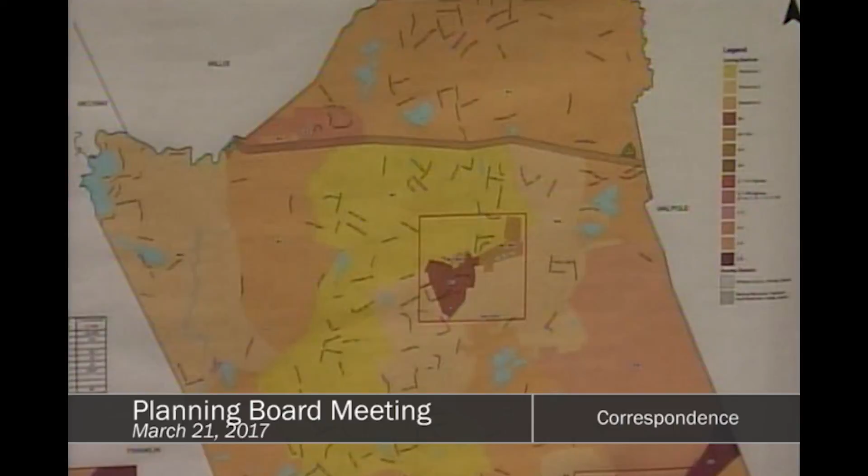The AG's office has approved all the zoning changes that happened two weeks ago, I think it was. So that's the only article we'd be looking at for the town meeting?

There is a noise bylaw that was proposed by petition, and I'm not sure that's going to be within zoning. It would be more of a town bylaw. They're proposing to put a certain decibel limit or something. Do you think they're targeting the car wash? No, I think it's run and gun ranges.

When is town meeting, what are the dates, do we know? May 5th, I think. I'm not sure they said it. It's that first Tuesday. I don't have it on my calendar yet. It's the 9th. Is that a Tuesday? Yep, it's the second Tuesday. Okay, yeah, that is it.

Do we have any other correspondence or new business items to discuss while we're live? We have, don't we, I'm sorry, excuse me.

Going back to the town meeting, don't we have a planning board meeting on the calendar for that night? Not anymore, no, that's my point, that's our normal meeting night. You've been bumped. So we need to reschedule that one, right? We'll probably make it the following week. We can do that at our next meeting.